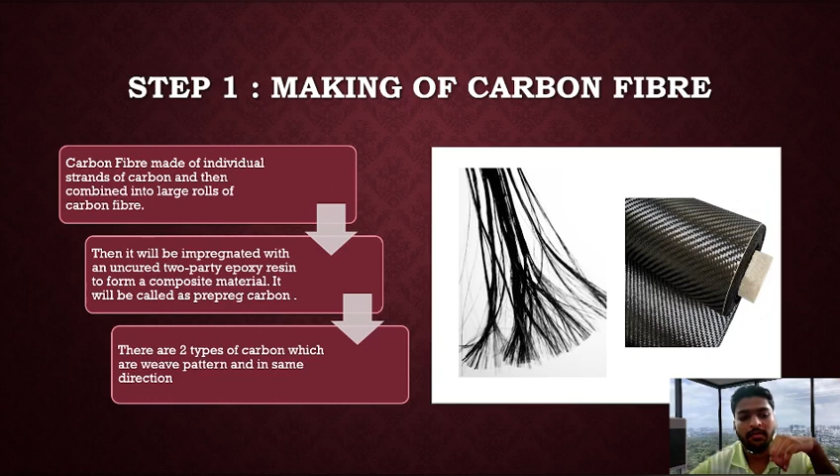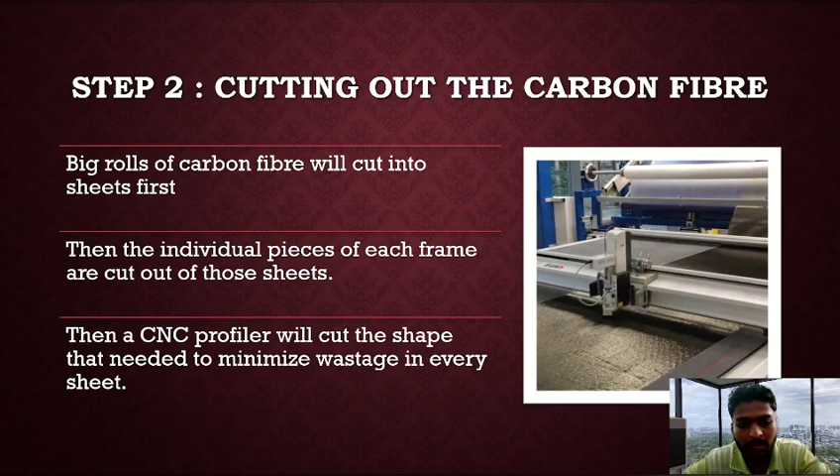Step 2 is cutting of the carbon fiber. So from the big rolls of carbon fiber, we cut into sheets first. Then the individual pieces of each frame are cut out of those sheets. To make a bicycle frame, they will be cut into individual pieces depending on the bicycle model and shape. Then a CNC profiler will cut the shapes needed to minimize wastage, because if we cut manually, it will waste more sheets of carbon fiber.

So step 3 is assembling. Every individual cut piece is assembled like a 3D jigsaw puzzle. Each bicycle frame will have approximately hundreds of carbon fiber sheets, and it will be assembled depending on the model of the cycle and the shape of the frame. The placement of each piece of carbon fiber should be accurate.

So it will be accurate, so we can make a bicycle frame accurately. Some pieces will be laid up in one direction and others will be laid up in the opposite direction. A frame could be made out of hundreds of carbon fiber sheets.

Then the frame will undergo mechanical testing. In the mechanical testing, they will torture the frame by giving 120 kg of weight on each side to test the durability of the frame. They will test a minimum of 100,000 cycles before it undergoes the next process.

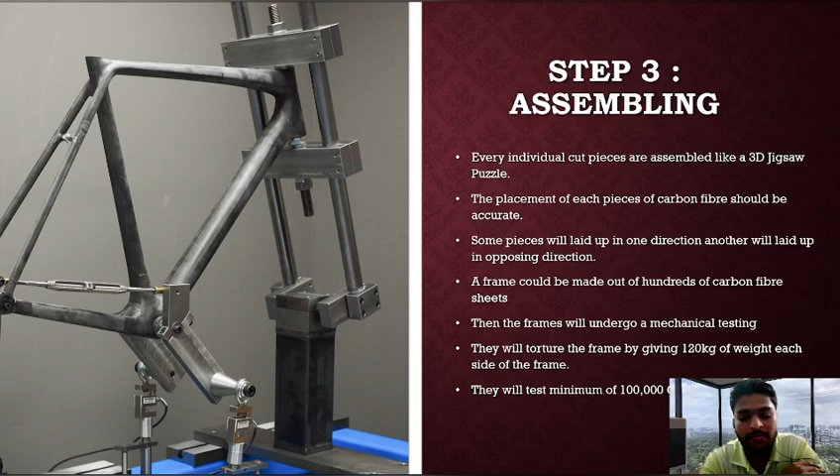So step 4 is molding. They take the layups with the bladders and preforms, which are like a plastic, and we will insert the carbon fiber and place them in a giant mold. The way it does this is through a monocoque construction, as in the picture.

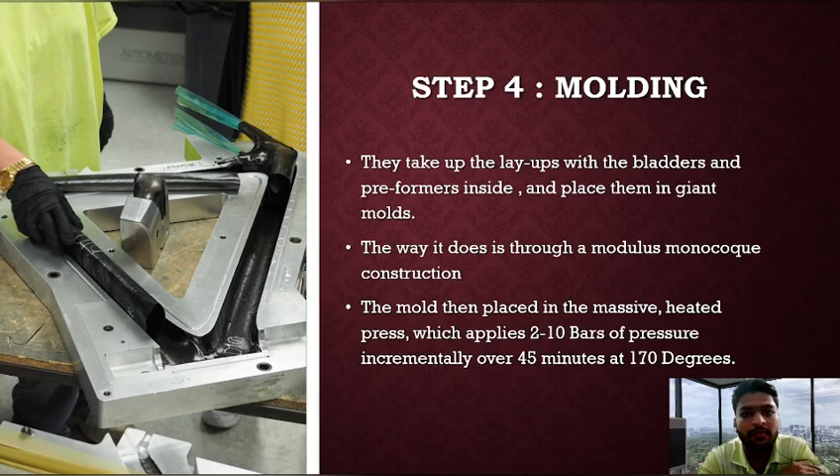The mold is then placed in a massive heated press which applies 2 to 10 bars of pressure incrementally over 45 minutes at 170 degrees.

Step 5 is debulking and curing the resin. Heat and pressure are applied to the outside of the frame in this process, while the bladders inflate on the inside of the frame, pushing it outwards. This heats the resin and allows it to flow evenly to eliminate creases and air gaps.

After it is heated, it cools for 50 minutes, then the curing process starts. The process is actually like the picture beside.

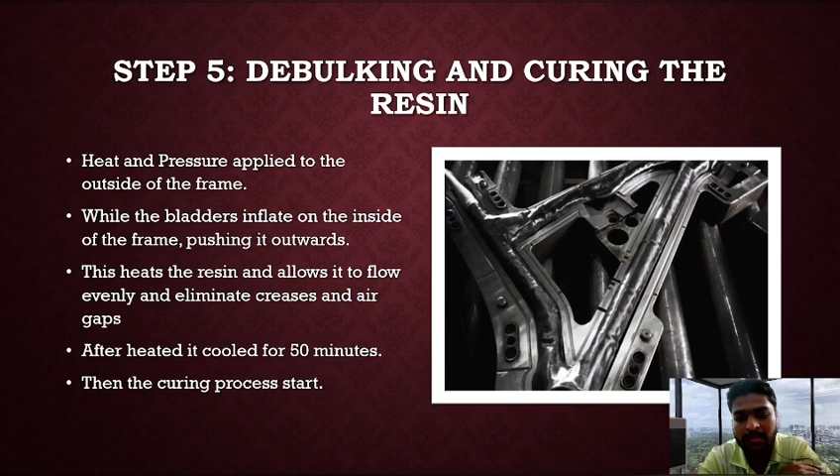So step 6 is surface preparation and machining. Surface preparation involves sanding it down as it comes out of the mold. So after it comes out of the mold, they will sand it to make the frame more smooth, and then the formers and bladders are removed from the carbon frames.

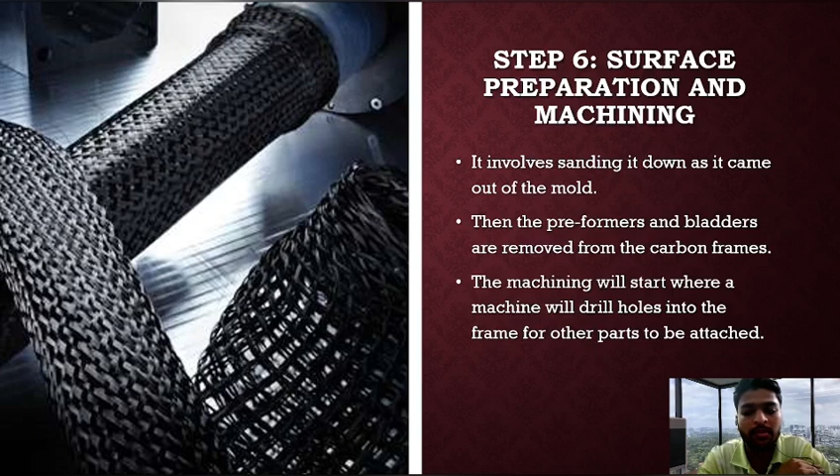The machining will start, where the machine will drill holes into the frame for other parts to be attached. So only after the sanding process will the machining start, to drill some holes for other parts to be attached.

So step 7, joining the front and rear triangle. Joining the different parts together to make the complete frame. This is about the final step. So they will join the different parts together to make the complete frame, as per the picture.

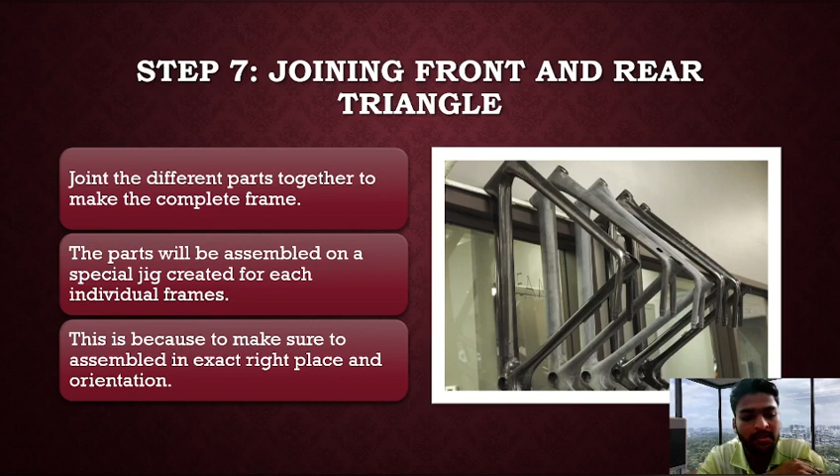The parts will be assembled on a special jig created for each individual frame. So each model of the bicycle frame will have an individual jig. So they will place every part of the frame in the jig to make sure they assemble all of it in the exact right place and orientation.

So step 8, surface finishing. After the joining process is done, they will start the surface finishing, which means they will start the QC process, checking for any imperfections in the frames.

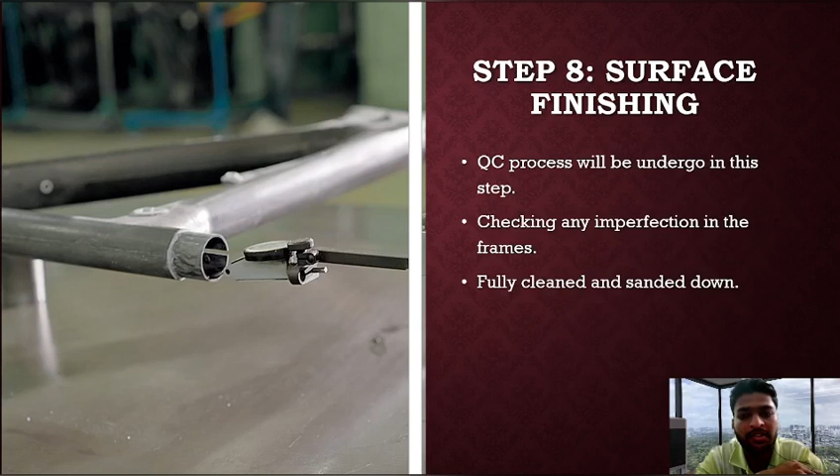If there is any imperfection in the frames, they will undergo step 7 again to make sure it will be in perfect condition. Then they will fully clean and sand it down again. So finally they will undergo the painting and decals.

So after all the process is done, they will undergo the painting process. Here the painting will happen. Then, after painting, they will do a clear coat if they need it. For example, there are paints like glossy and matte. So if they need a glossy paint, they will add a clear coat on it.

Then they will stick decals, depending on their brand and models of the bicycle. For example, in this picture, they stick decals named Orbea. Then these frames will be delivered to the customers.

We have decided to choose a combination of two materials, carbon fiber and magnesium, as distinct from the combination of carbon fiber and aluminium. In the investigation, we observed that the combination of carbon fiber and magnesium is more solid and compact, rather than aluminium, which is lighter and thin. It really suits the rim tire.

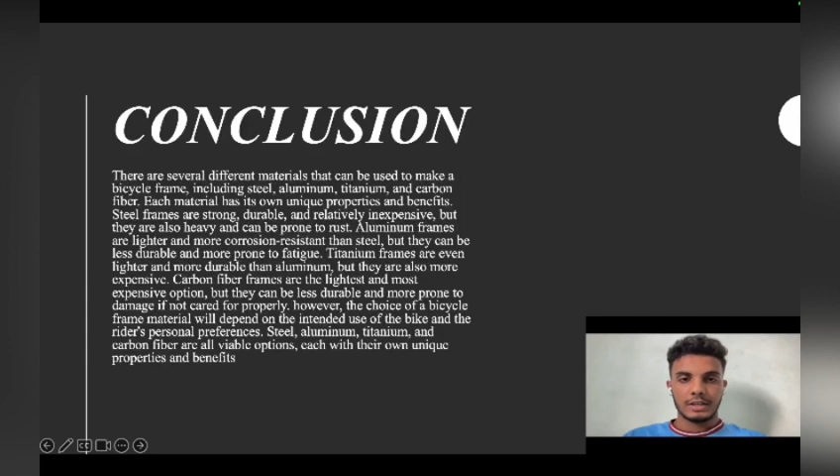So in conclusion, there are several different materials that can be used to make a bicycle frame, including steel, aluminum, titanium and carbon fiber. But some are also heavy and can be prone to rust. However, carbon fiber is the lightest and most expensive one, but it can be less durable and more prone to damage if not cared for properly.

In the end, the choice of bicycle frame material will depend on the intended use of the bike and the rider's personal preferences. Steel, aluminum, titanium, and carbon are all viable options, each with their own unique properties and benefits. Thank you.